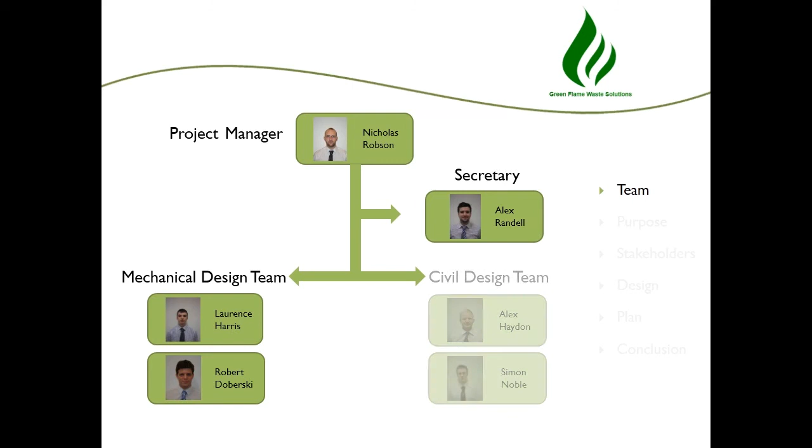As a group, our key skills and competencies lie in technical design, logical processing, automation of systems, civil design, and mechanical design, all derived from master's level engineering courses and a number of years in various placements and work experience.

The purpose of the project sets out to satisfy and meet the requirements defined at a national, regional and county level.

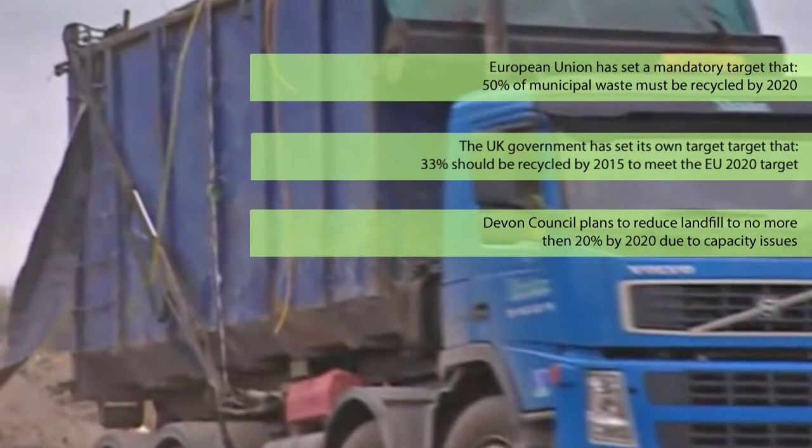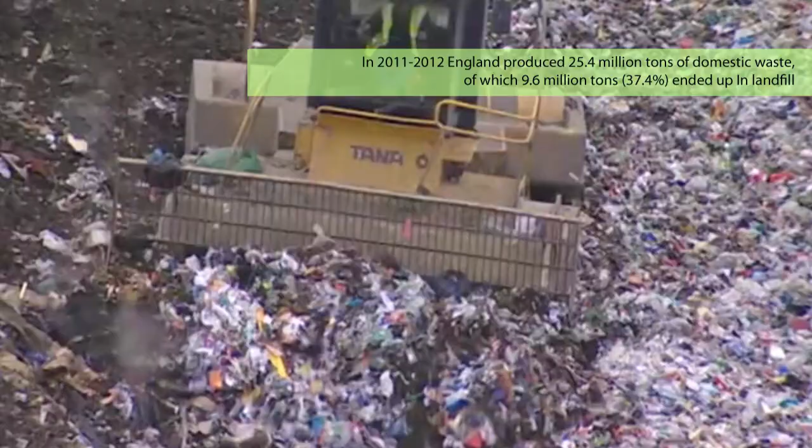The government is encouraging us all to use landfill sites less and less by charging the industry through landfill tax. Some of this money is then given back to centres in the form of landfill tax credits to redistribute to local projects that support the environment in the vicinity of the landfill sites.

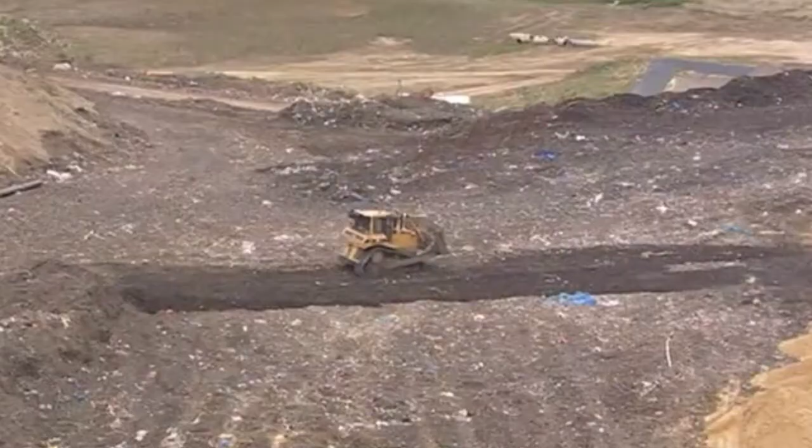In the Devon County Council Waste Plan and the Plymouth City Council Waste Plan, the county's objectives for 2031 include an increase in recycling, an increase in the amount of energy generated from waste which cannot be recycled, and a reduction of waste sent to landfill.

Furthermore, waste currently arising in North Devon is sent to landfill, a practice becoming increasingly more expensive and nationally unpopular.

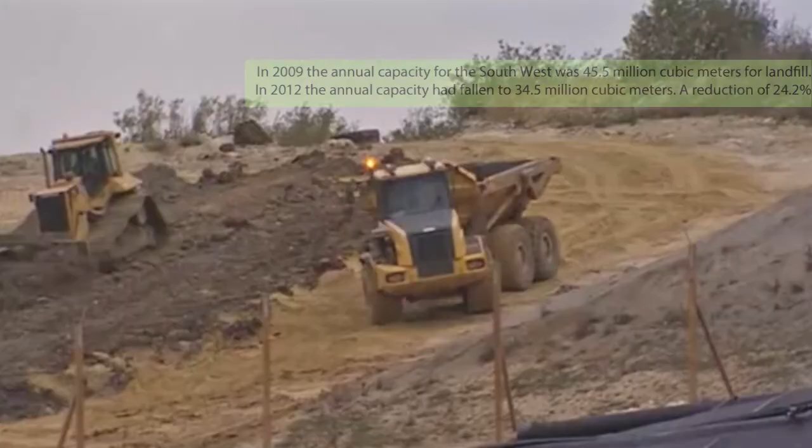We have identified and categorised all the main applicable stakeholders for this design project.

First, we find consultants. We will communicate with specialists to ensure that our site is of the highest quality. The government's regulatory bodies will have an important role in ensuring our site exceeds the relevant standards.

We hope to engage with activists and local groups to address any issues they have. Our plans aim to minimise disruption to the local community.

Involving competitors at an early stage will allow for strategic collaboration and basis of standards. Our aim is to add value for our customers whilst allowing them to dispose of their waste in a safe environment. We will work with Network Rail with the aim of reopening the passenger link permanently from Exeter to Okehampton.

Investment into this project is paramount, and we will work to add value to each party involved. We will now move on to our full concept design.

The Okehampton location is the best viable option due to all the other Devon centres being within a 30-mile radius, allowing for good coordination and collaboration. Okehampton provides excellent road links with the A30 and has a direct rail link with Exeter City.

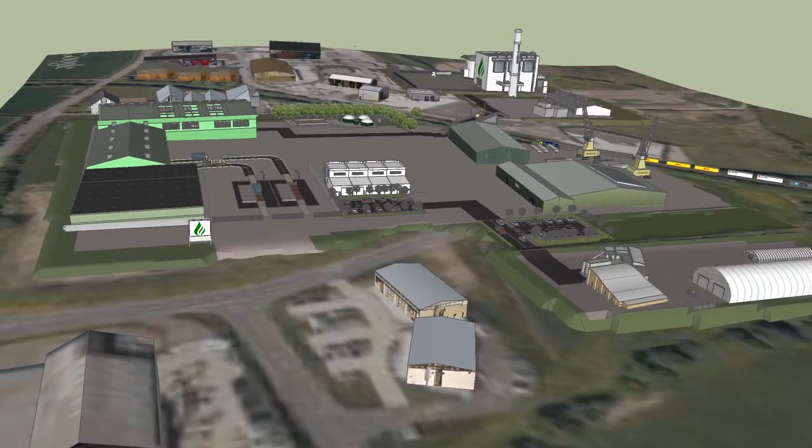This is an overview of our complete site. The site entrance weighbridge incorporates a two-way in-out system with a computerised vehicle recognition system.

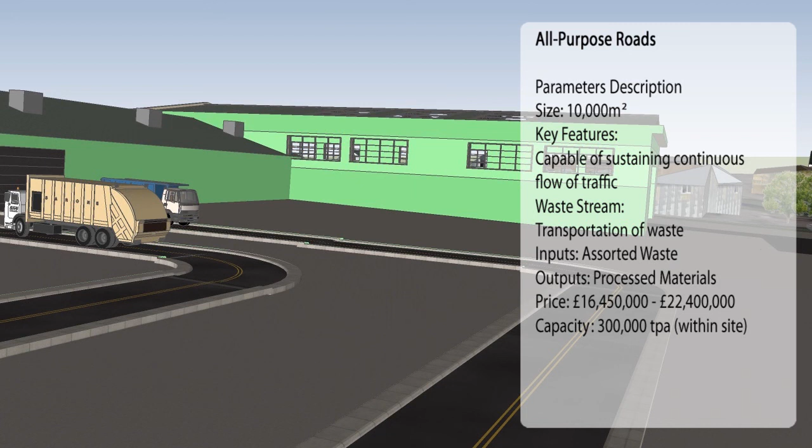The roads are made up of a one-way system attempting to minimise distance travelled between the various processing sites, improving efficiency. They also incorporate integrated road connections to provide an easy flowing service for public customers. However, the public do not have access to areas where automated guided vehicles are in operation.

This leads us on to the waste transfer facility. The waste transfer facility will be designed to deal with 300,000 tonnes of materials per annum. The system will make use of automated guided vehicles which have been adapted from similar vehicles used in the cargo industry.

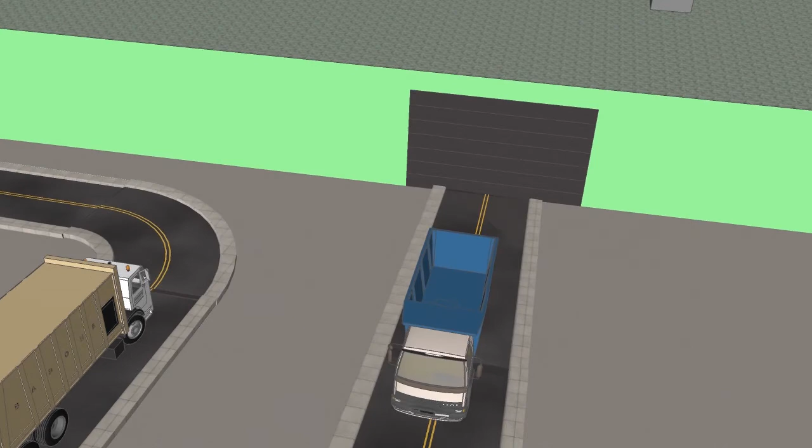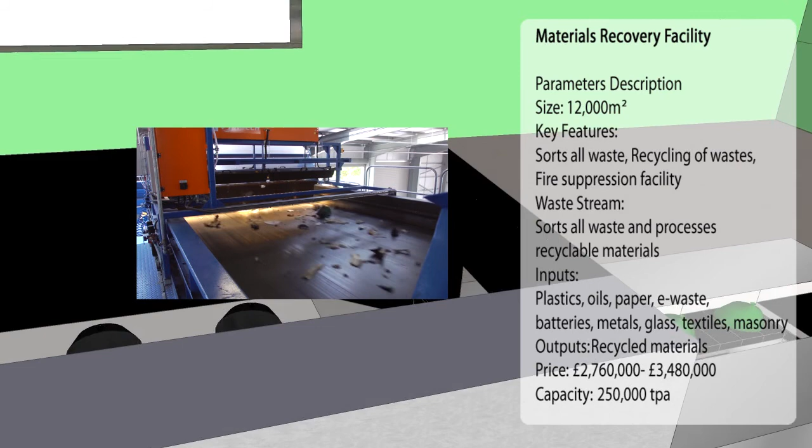This links to the materials recovery facility. The material recovery facility will sort and process 250,000 tonnes of waste per annum, aiming to recycle and reuse as much of the waste as possible. Any further waste will be recycled into alternative processes to maximise reuse.

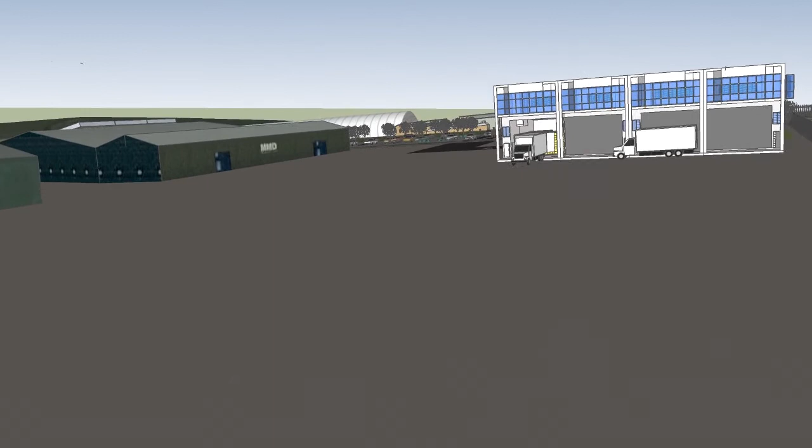Moving on, the Operational Facility Control Centre, located centrally, manages the site processes. It is the main control block.

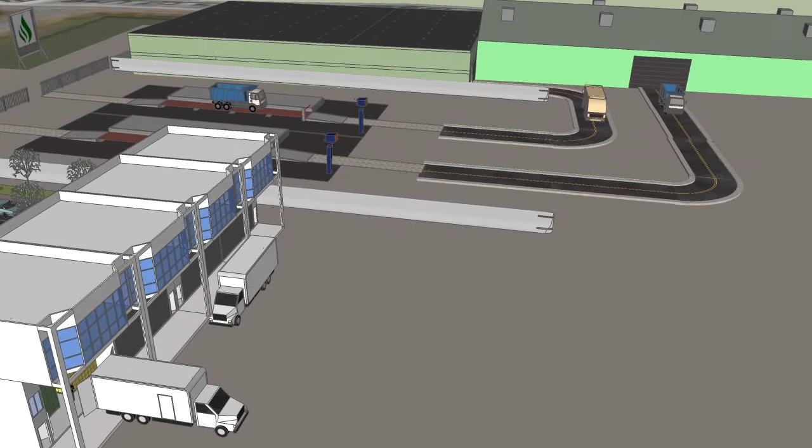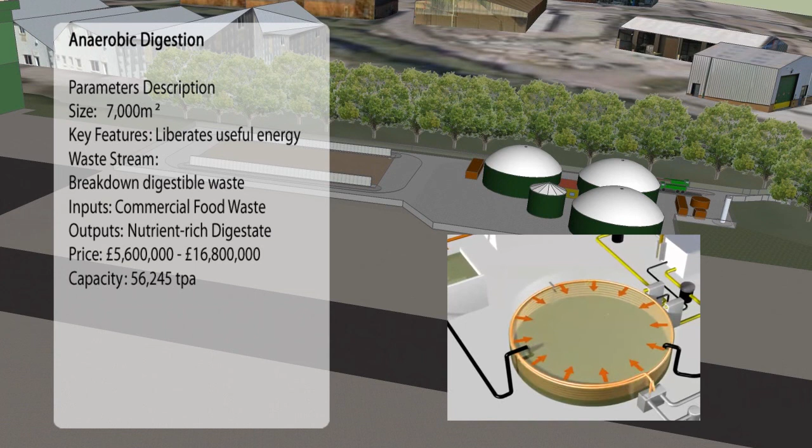Next, we move on to the anaerobic digesters. Anaerobic digestion utilises waste heat from the incineration process whilst outputting useful fuels and substances that can be used elsewhere on site or sold.

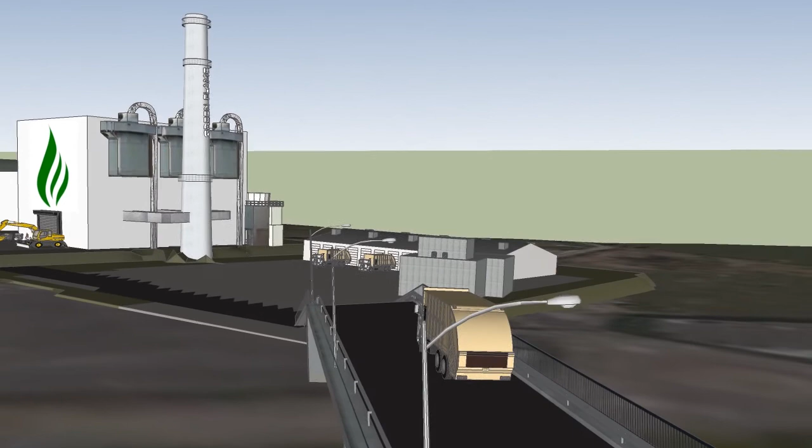The bridge facilitates movement across different zones over the rail line, including a vehicle storage and maintenance area in this zone. This helps ensure safety and standards are adhered to.

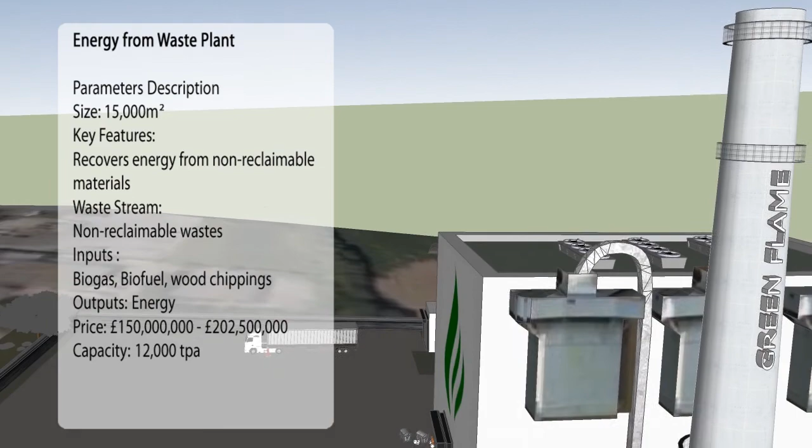The energy from waste plant will burn 12,000 tonnes of non-reclaimable waste per annum to generate energy. This energy will be used around the site. If surplus is generated, then the energy can be sold to the national grid.

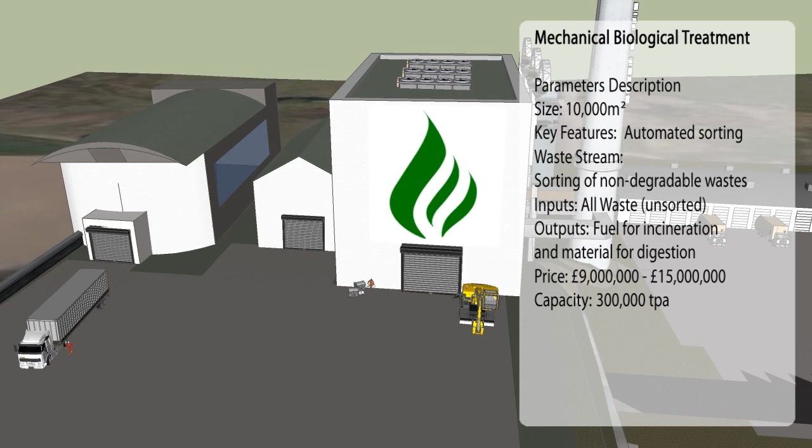The adjoining building incorporates the Mechanical Biological Treatment Centre, processing non-biodegradable waste. The waste is dried and sorted and used for solid fuel for incineration.

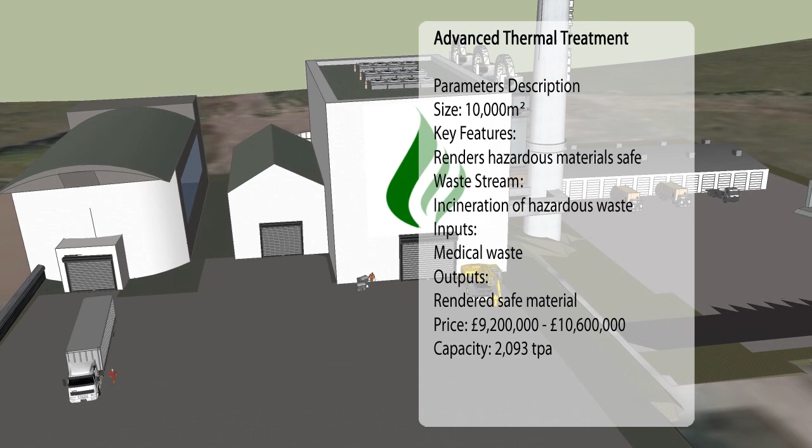The Advanced Thermal Treatment Plant, located adjacent to the energy from waste plant, is separate due to the safety requirements dictated by legislation. The Advanced Thermal Treatment Plant will burn hazardous wastes, such as medical waste, to render it safe. We expect to deal with 2,000 tonnes per annum. This waste needs to be dealt with separately to ensure the waste is processed completely.

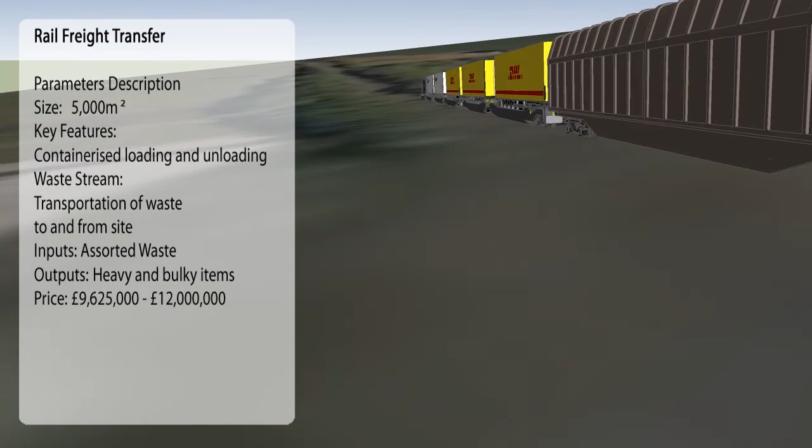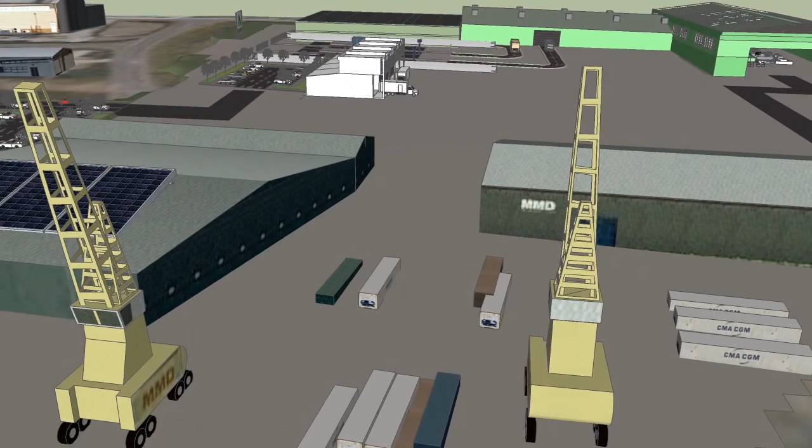The rail freight transfer features containerised loading and unloading, allowing for the transportation of large quantities of materials to and from the site. This system reduces traffic loads of up to 20 trucks per delivery. The site is energy efficient as per the environmentally friendly criteria set.

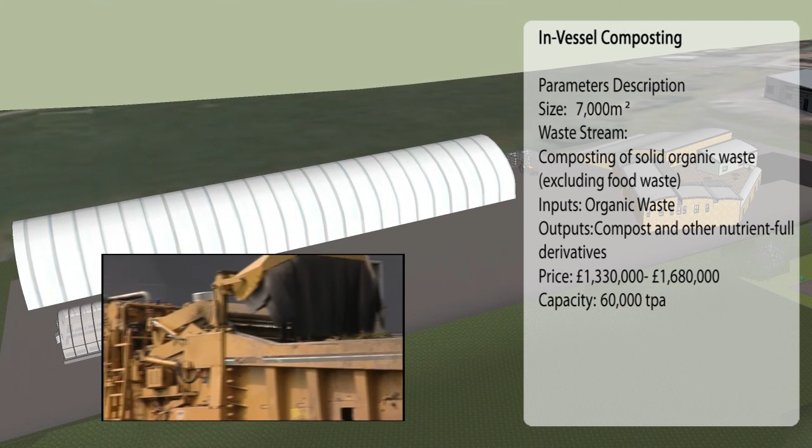In-vessel composting will take in organic solid waste, such as garden waste or lumber, and return nutrient-rich derivatives. We predict to deal with 60,000 tonnes of this waste per annum.

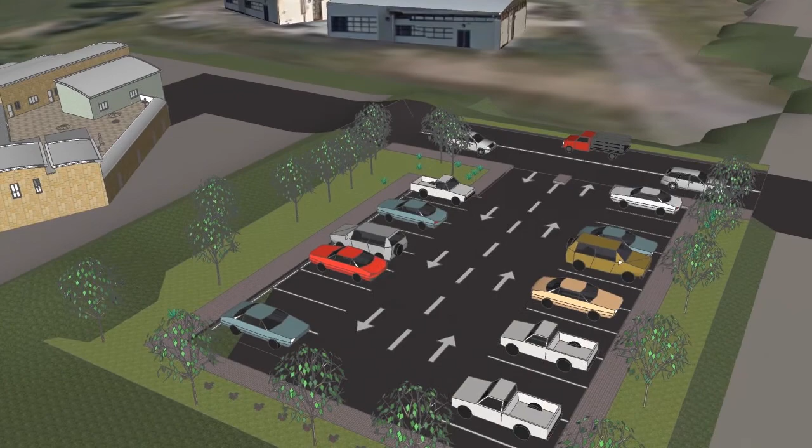The Education Centre will provide a place where the public can be educated on how waste is dealt with and how they can reduce the amount of waste they produce. Pursuing this will help build a relationship with the local community.

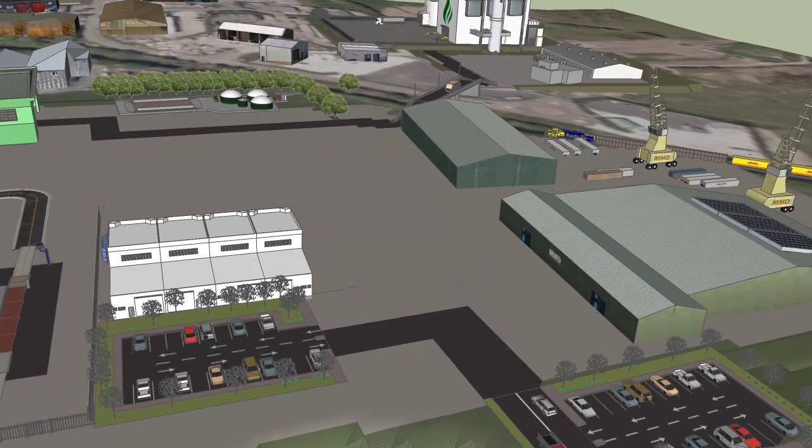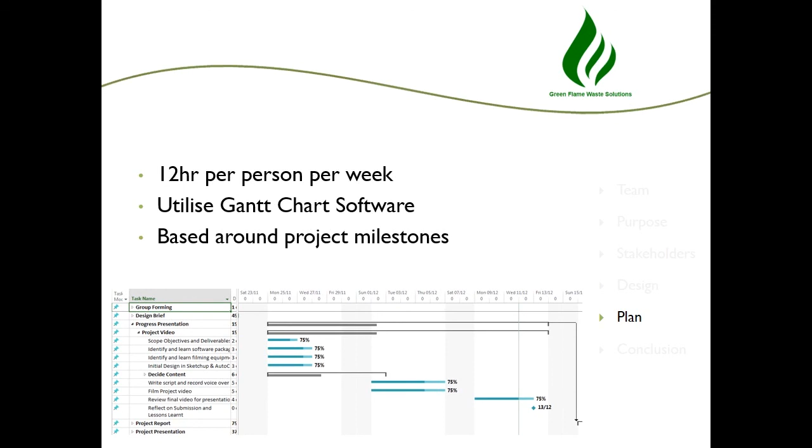The plan for producing detailed design is based around using Gantt chart software working towards project milestones. Risks involved with the completion of the project will be tackled using the PMI key stages as a template for creating company risk registers. The total cost is estimated at £444 million for construction, including a 20% supplement in case of risk.

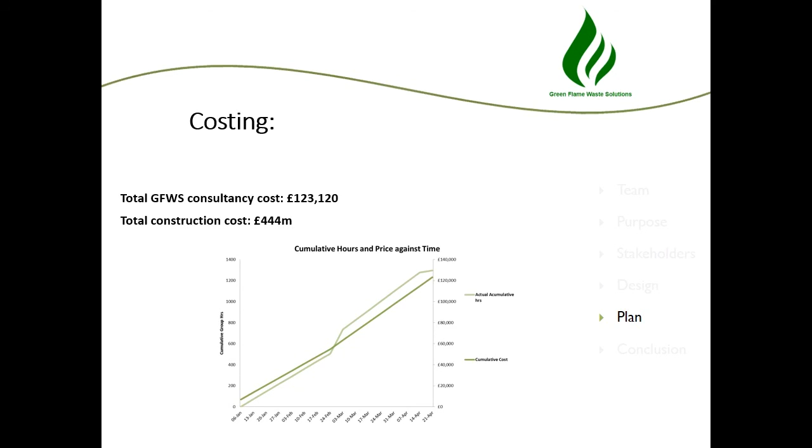And £123,120 for our personal fee.

Our solution is not only an environmentally acceptable design, including philosophies of zero to landfill and the reduce, reuse, recycle hierarchy, but also a socially accountable and inclusive centre. The site contains the infrastructure to process all forms of waste using the latest technology and processes available today.

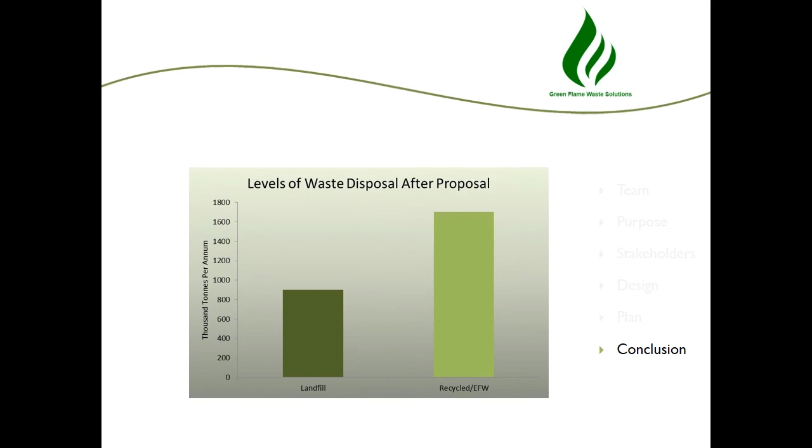We anticipate an input capacity of 300,000 tonnes per annum, which will reduce the amount of waste sent to landfill by 25%, as shown on this graph, putting Devon well within its target and creating a brighter future today.